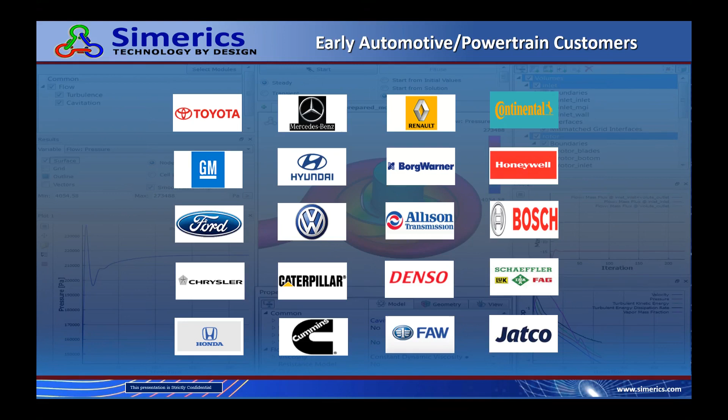As a result of that, all of these companies have become early users. Over that same period of time, from them until now, we now also have hundreds of turbo machinery type applications at companies as well. In the centrifugal axial pump world alone, we've got over 100 sites, and these are just a few of those companies.

Again, it's what this webinar is about today, trying to illustrate why these companies are choosing Simerics over other CFD, because often a lot of our clients have already got CFD, so they bring Simerics in to assist, or because it can do things so much faster. More recently, we've seen an upturn from other turbo machinery type applications, so fan companies, compressors, turbines, propellers, and turbochargers, these sorts of things.

As we grow as a company, as we get to talk to more people, the fundamental core part of our technology being fast, robust, accurate, it really resonates with a lot of people. We're very happy just to have so many more people turning to Simerics, as opposed to continuing to use other solutions that they have.

So what is it about Simerics? Well, in generic terms, this is what we're trying to do. We're trying to help people be more efficient in the way they use CFD, whilst maintaining the performance accuracy that they need when doing simulation, if you're going to use simulation at all.

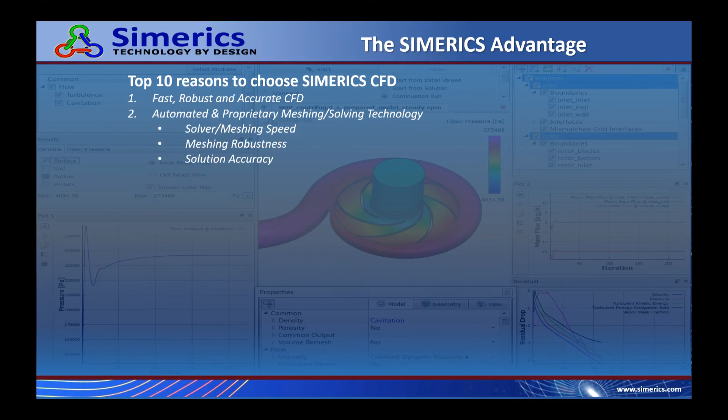Simerics does that for you, and that's really what we try to ensure. But all the time we know that our clients aren't going to be using our software unless we can make sure that we provide accurate solutions too. So there's no compromise in what we're doing here. We obviously want efficiency, we want more speed, but at the same time, we want our answers to be as accurate as they can be.

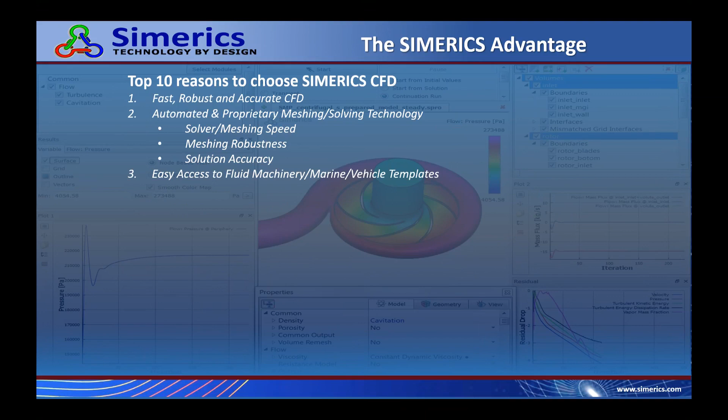We've enhanced the setup process from the very beginning. We have a template philosophy, so depending on the machinery type you have, you can grab a template from our library, and it then steps you through the process of building a mesh and setting up the operating environment, the conditions, etc., that you might need for that particular type of machine. That again is an area which helps speed up the whole process.

In more recent years, we've been partnering with a lot of other companies, and we now have embedded CAD front ends for various systems. So there's things like Creo, Rhino, NX, and Fusion. We can put Simerics right inside your CAD system if you want.

At the same time, we have various technologies and processes for integrating, so irrespective of what design solution you're using, Simerics now has a way of becoming part of that design process. And that really leads to leveraging your CAD geometry, because ultimately, that's what a simulation tool should do—it should be making use of your 3D CAD systems.

Part of CFD, the first step is always to create a flow volume. You have to have that empty space that exists, needs to become a part, so we can do some analysis on it. We do that. We can do that inside the CAD. We can do it outside your CAD system with our new Simerics CAD that's coming out.

We've also got beyond CFD. A lot of our clients are saying, well, what about optimization? What about acoustics, radiation, electromagnetics, FEA? Can you do these other things? So again, during more recent years, we've added to our portfolio, and now you can do a lot of these things inside the Simerics GUI.

Custom deployment—a lot of our customers do want, often ask us for something very special, and typically the answer is yes, we can do that because we've got this very powerful expression language that comes with the software. And the last point, I think a lot of clients recognize, is because we are still independent and intend to remain so.

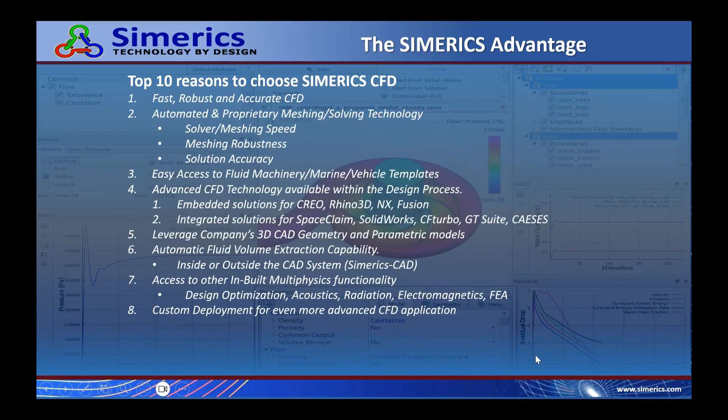So diving into a bit more of the why Simerics for turbo machinery: these hundreds of clients out there doing work with Simerics every day are typically doing a number of different things. What's of primary importance most times is, what is the performance of my product? It's sort of a given, whether they're looking at it at a component level or looking at how it performs in the system. That's clearly what they want to know.

They want to be able to virtually test that. At the same time, when making design decisions, you want to compare very quickly, so you want a means of doing prototyping, but doing it virtually.

But drilling down further, there's things like: what impact might cavitation have on the system of this pump? Is that going to cause failures? Are there noise issues occurring, or pressure ripples? Analyzing loads, leakages, NPSH studies even for a pump — these are the sort of things our clients are doing every day. We're used to supporting them; we have experience of these types of things. That drives us in terms of how we're developing our software and how we're looking after our clients.

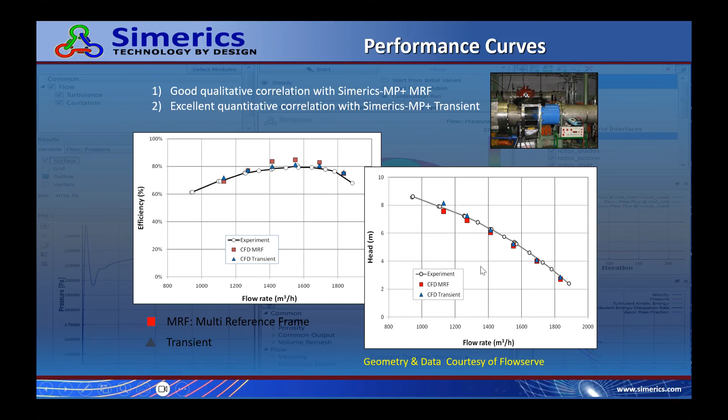On the issue of performance, everyone asks how accurate Simerics is when it's so fast. Well, very accurate. This is a test done many years ago by Flowserve. We have two approaches: the steady-state, quick analysis where you can pick up trends and make design decisions, but if you really want to nail the numbers — the experimental data — we always advise doing transient calculations. If you do that, this is what we typically expect when doing these comparisons experimentally.

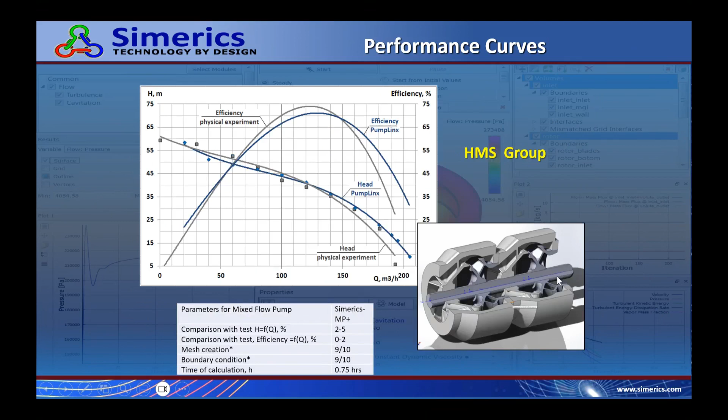This was another client who did an evaluation. They had an existing CFD tool and ran 3 test cases, producing all this data about how close we are to experiment. But the important thing is what they quoted in their report: yes, it produced very accurate answers, but it was the speed at which Simerics could do that. They were spending less than an hour typically preparing their CAD models, and it would just mesh straight away for them. The whole process was 10, even 30 times faster than their existing CFD tool, with accuracy levels within 1% and 3%.

So again, once clients typically do these tests, the argument for Simerics becomes pretty compelling.

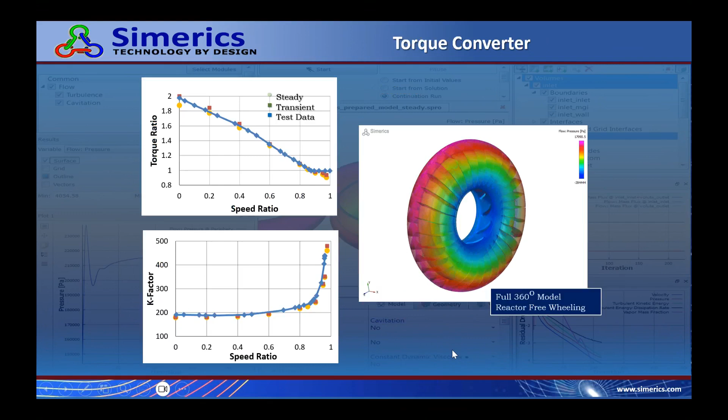And it's not just where there's some sort of motor driving the system — we can also do fluid-driven activities. This is a torque converter example, and again you see how accurate we can be. There's lots of capabilities in the turbo machinery area that we have.

Last few comments about testing: how we're testing is obviously critical, and everyone's always going to carry on doing that. What we're trying to do is help people optimize the amount of physical testing they're doing. It's not necessarily replacing it, it's trying to optimize it, because it can be a lot of trouble building these test rigs, such as a special test rig where you can actually see inside what's going on. Every time we do a simulation, we're always seeing what's going on inside the product.

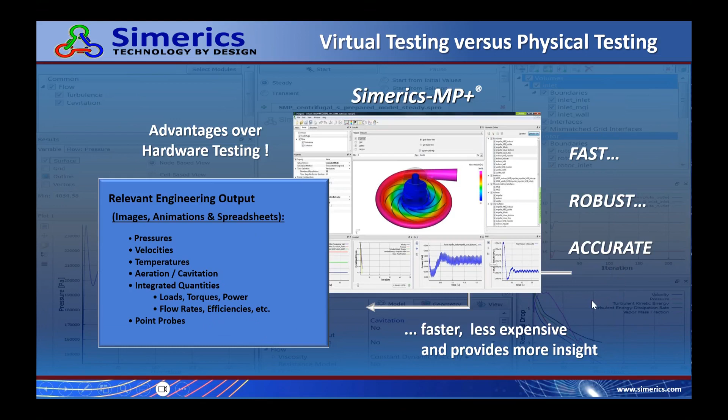So we want to make the best use of the physical testing you're going to do, and that's what Simerics is all about. The way we present the software, we want people to get information out quickly and efficiently — whether it's pressures and velocities, temperatures, cavitation quantities, torque loads — we want these things readily available. The only way to do that is with a tool that's fast, robust, and accurate, doing these things quickly, efficiently, reliably, so that you end up with this type of solution.

So in summary, it's all about speed, without any compromise on accuracy. If you've got small features, we'll include them because sometimes they can be important. We've got a range of physics modules that address all sorts of different things, such as cavitation, etc.

The robustness, getting a complete performance curve across the turbo machinery device is always very important, so we're very confident about that. And also, if you need to do full-blown system simulations, Simerics has that capability, and it does it, we believe, a lot better than anyone else.

Less than 2 days training is typically what we ask for when people want to start using Simerics if they haven't used it before.

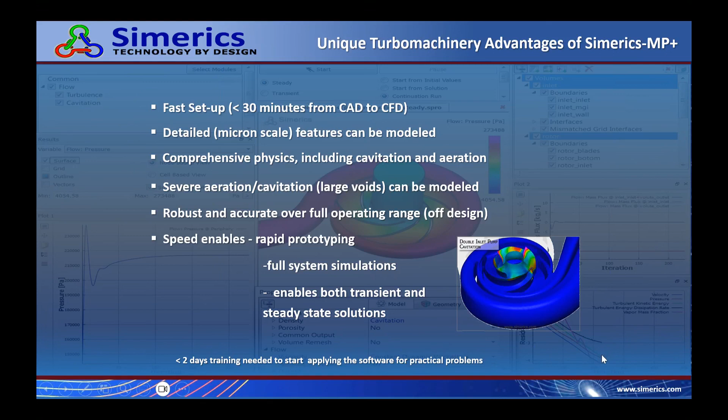So the last thing I'll say is just to set the scene for the demonstration you're going to see. We feel we have lots of different solutions for the way Simerics can fit into your design process. What we're going to show you is how we can very quickly and efficiently go from CFturbo, a turbo machinery design tool, straight into looking at virtual test results. That's really what this is about. And then we're going to go on and talk about how we go about optimizing things, etc. So that's what's coming next.

I'm going to stop sharing for a moment and hand this over to Mike. Can I make you the presenter? Okay, there you go, you've got it. You've got the thing. That's it, we got you.

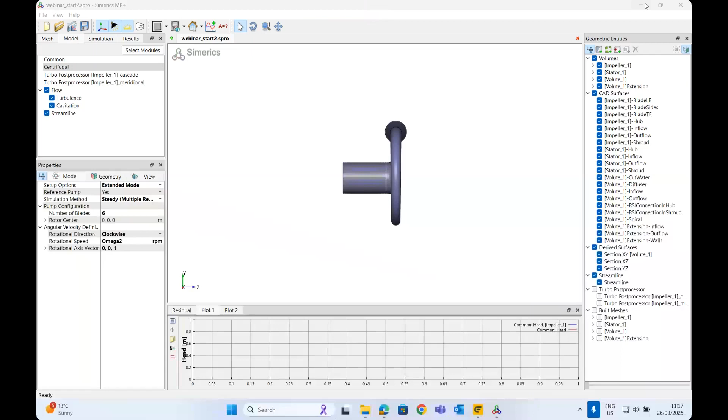So what I'll do here is go through the whole process in CFturbo. Let's start by designing a pump in CFturbo.

If I click on the pump generation thing, I can give it the design point I wanted, the best efficiency point I'm designing for here, and click OK on that, and it will give you an indication of what type of device is coming up. So it's a radial impeller there.

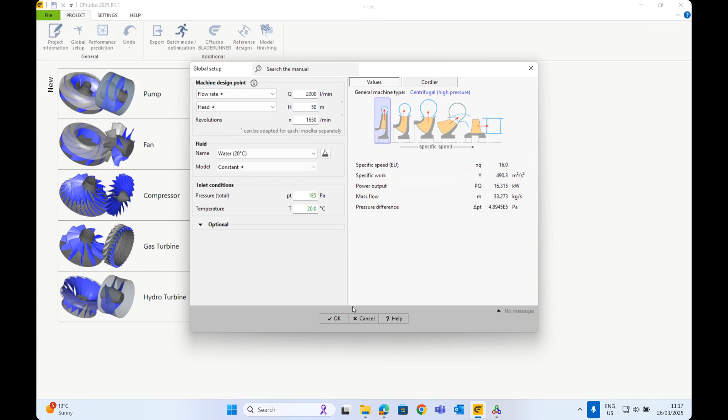If I click OK on that, CFturbo will step you through the process. The first thing to do is create the impeller, and I can go through various setup things in terms of whether I want it shrouded, unshrouded, or whatever, and put in some basic dimensions. Or I can just hit a fast forward button, and it will immediately generate a pump impeller for me.

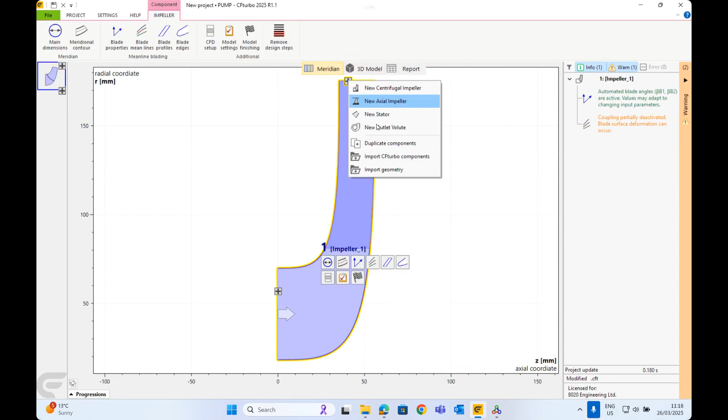On top of the impeller, to do a CFD analysis, I also need a volute on the outside of this. Again, there's a process you can step through designing each of the stages, or I can hit a fast forward button and it will create that.

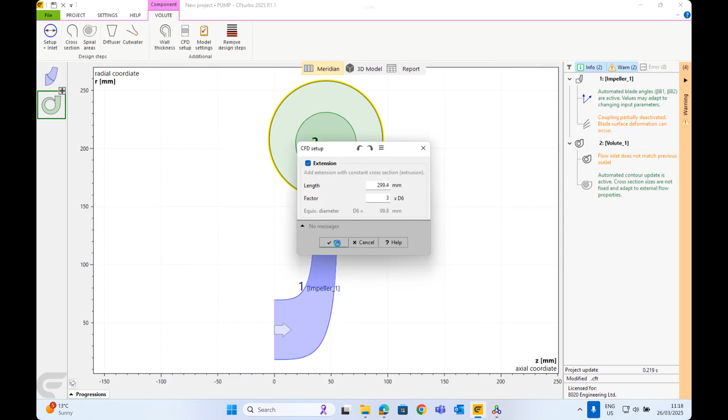As far as the CFD simulation, I probably need an extension on the outlet of the volute, so I'll add that in. It will also help to have a tube on the inlet of the impeller, so I'll add one of those in here. Let's just lengthen that slightly.

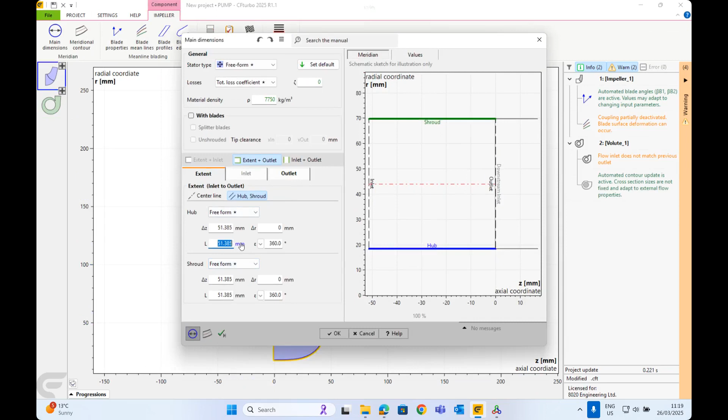And there we are with a 3D model of a centrifugal pump, ready to go. So the question then comes: is that going to give the performance I need?

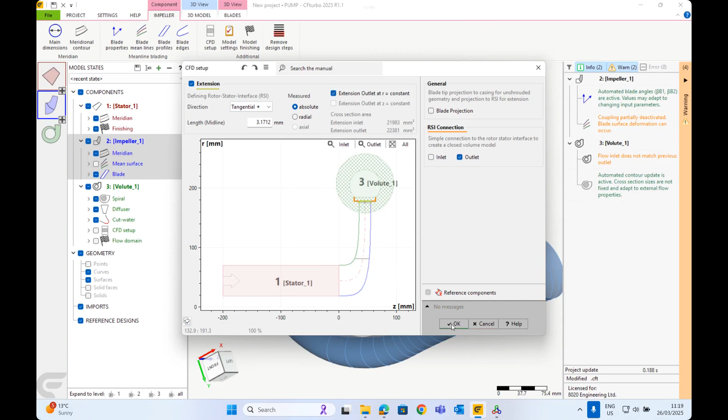So one thing to set up in terms of getting it ready for the CFD is just to add a connection between the impeller and volute. Click OK on that, and we can come to the project here, and we could export that to Simerics. First off though, I'll just save this model.

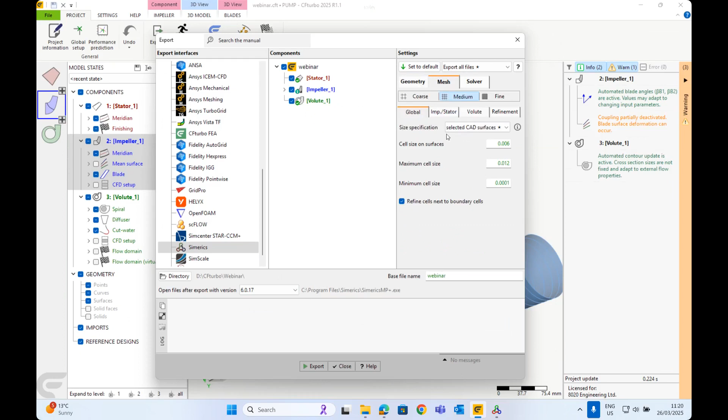If I come to export here, I can select all the components, make sure it's a virtual domain, make sure we're using a relevant version, and then we can just hit export here. There are a lot of controls in here as well for setting up the refinement level of the geometry the STL mesh is going to come up with, and then the finite volume mesh. In this case, I'll just leave it to default.

So basically it then goes away and creates the STL files of those three components, fires up Simerics, checks the license, and carries on from there. As it's taking a bit of time to generate the mesh, rather than keeping you waiting, I've actually just had that process completed here.

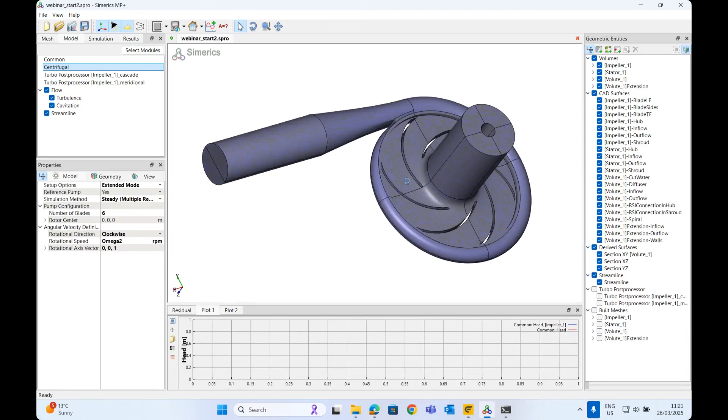So this is the mesh it will come up with, and you can see it's just started the meshing process. I could just show the grid it's produced and so on.

And then this model is just totally ready to run, so I can just hit the start button on this. And if I show the pressures on here, you can start seeing the pressures develop as the solution progresses.

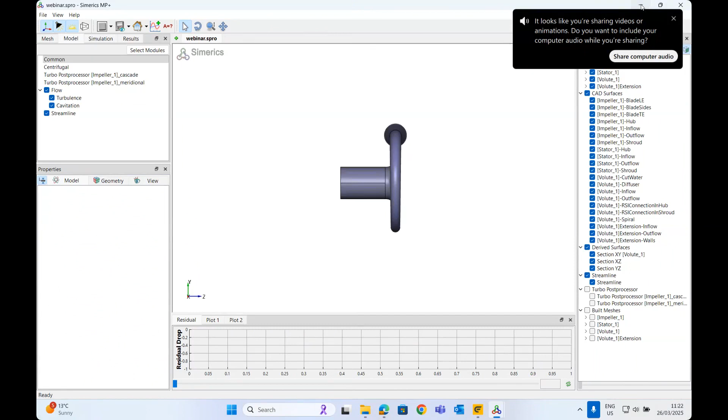That's actually finished the mesh on the other one now, so that gives you an indication of the time involved. So that's the pressures. I can also look internally, so I can get streamlines out, and I could color those streamlines.

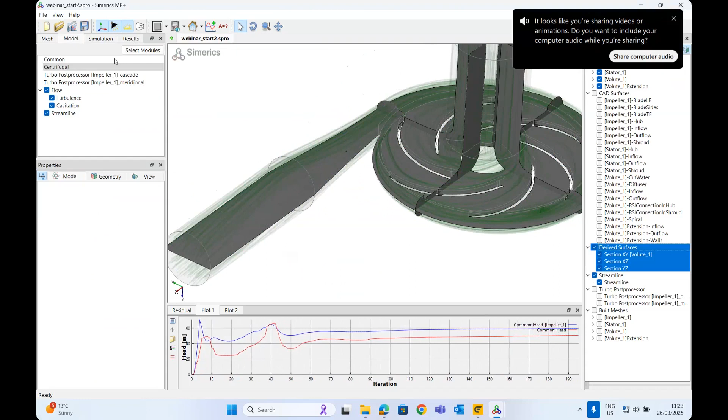Okay, so I got that back again. You can show the velocity colored on there, and I can animate those as well. On top of that, I also showed sections through the thing. CFturbo will actually automatically find those sections for me.

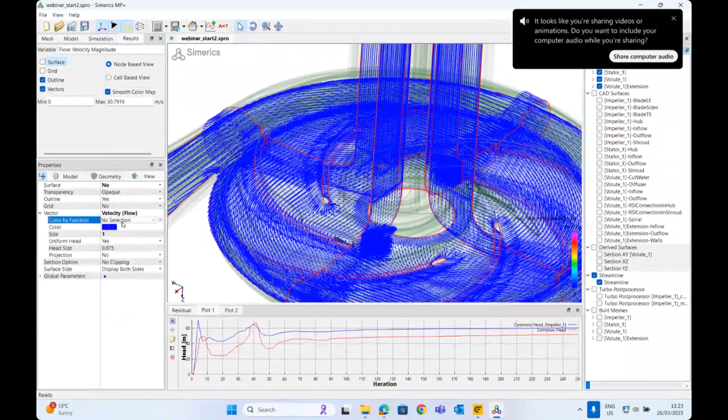So I could put show velocity on those, so you can get an idea of velocity flow patterns. And if I add vectors to that, I can show the colors on those vectors, and you can start diving in and seeing where things are.

So you probably also want to get out from here some actual quantities. At the bottom here, we've got a great graph going already showing the overall head that the pump is generating. If I zoom into that, the design was 50 meters, and I've just got a little overlap from the design, so it's performing well there.

And you can get efficiency graphs out of here, so get up to about 78% efficient there. And you can add more graphs in here, more information.

For instance, I could get the power out of this here, and you can change the units of that. So it's about 20 kilowatts required to turn the pump around on there.

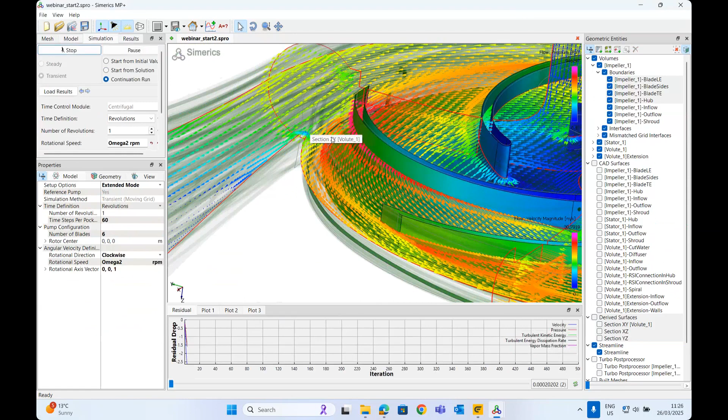I could also just restart this simulation as a transient simulation, 60 steps per revolution, and it's as simple as just starting that again. So the transient simulation will actually capture the interaction between the blades and the cutwater, which tends to increase the accuracy of the solution.

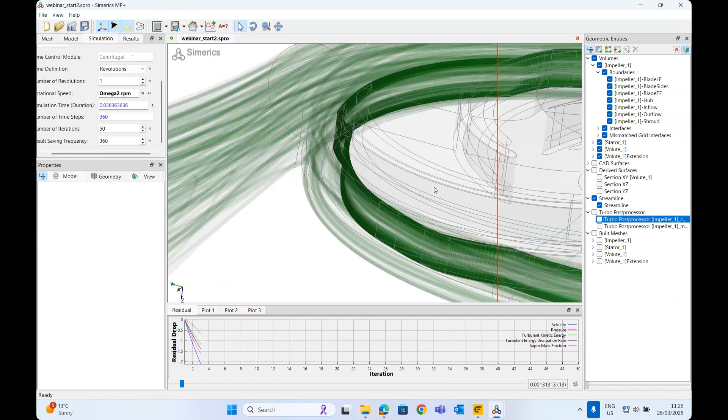See the animation coming on. There are also other plot information I can get on here. I can get a cascade plot of this.

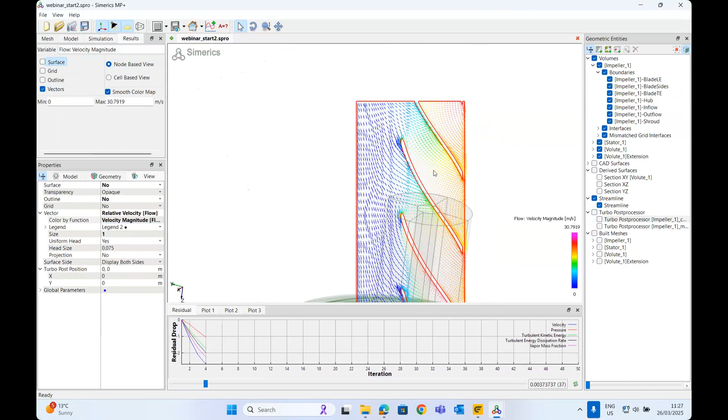So if I show the velocity on there, maybe I can show the vectors, and I could show the relative velocity magnitude. So this is a section halfway through between the shroud and the hub, and we're showing how the flow patterns develop through there.

To illustrate where that is, I can just change this to 3D mode, refresh it, and it then appears in the real position. So you can slide this up and down and so on.

So basically in the last 5 or 10 minutes, I designed a pump and simulated it fully steady state, and started a transient calculation on this. So we are well on the way to designing that. Really the next step from there is to talk about optimization. So I can hand over to Vignesh, who will explain some of our optimization capabilities.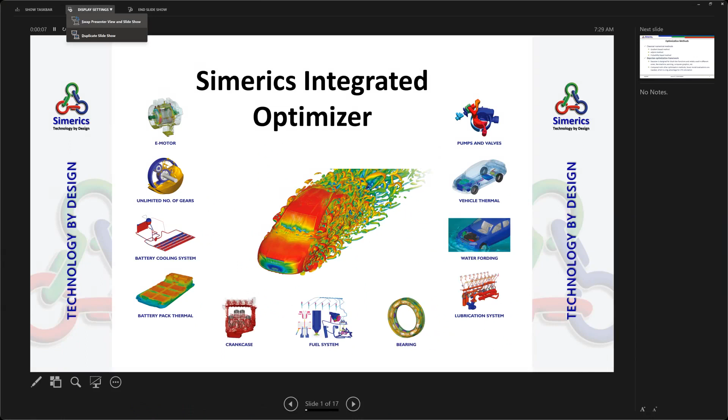So I do have a small demonstration of our optimizer. Before going into the demo process, I would like to go over a presentation so I can explain how our optimizer works.

In general, we broadly categorize optimization into 3 methods: gradient based, adjoint, and probability based. What we use in Simerics is the Bayesian optimization framework, which falls under probability based technique. The good thing about the Bayesian framework is it's widely used in machine learning, and it's a black box function in the sense that the optimizer itself doesn't need to know about CFD to perform the optimization process. It also needs fewer model evaluations compared to other optimization techniques such as gradient based.

So that way we don't have to do much CFD. We can get away with doing fewer CFD optimization runs and getting the optimized solution. So this slide will show how this Bayesian optimization works.

Say if we have one independent variable x and a dependent variable f of x, and this blue line is the relationship between these two. So I need to find a point x where this f of x is the maximum. That's my goal. But say I don't know this blue line yet. In a real world CFD simulation, you don't know the relation between the dependent and the independent variable. So you have to start somewhere, right?

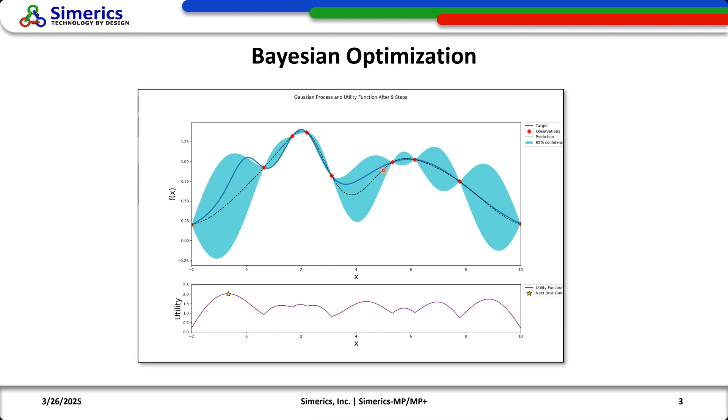Looking at both the spline, the polynomial that connects these points, and the probability, makes our optimization more robust. It's able to explore pretty much the whole parameter space, and we are able to get the whole curve and the local maximas within a few iterations. So that's how Bayesian optimization in general works, and that's how it works inside our software.

So to begin with, we started with 2 DOE points for a simple case like the previous one. But in reality, we have many independent variables, like blade angles. Say in a pump, you might have 6 blade angles. So then you have to distribute the sampling points evenly in the parameter space. In this case, say there are 2 independent variables, X and Y.

If you're distributing it randomly, you might leave some parts out, not exploring certain parameter space. That's why we use this technique called Latin hypercube sampling, where you put effort to distribute these DOE points evenly in space. This is a 2 parameter space, but even with a 10 parameter space, you'll still be able to distribute it evenly.

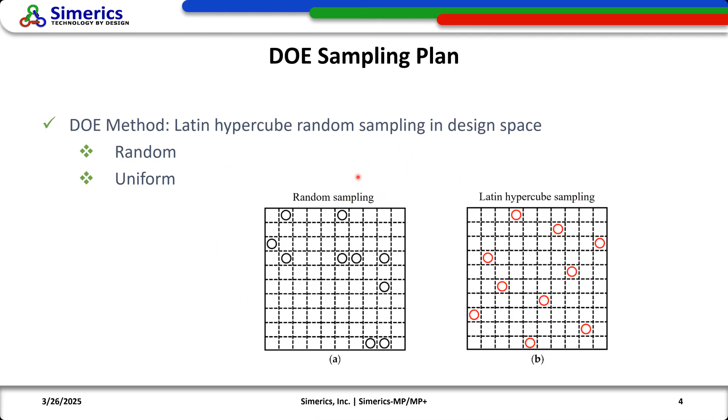This is the default option in Simerics, but we do supply random sampling in case the customer needs it. And this is the module interaction. I hope everybody has heard about Simerics and the CFD software. It's been there for like 20 years, and this optimization tool is relatively new, like 5 years give or take, but now it's really mature, and it's tightly integrated with the CFD solver.

You don't need to go to a separate window to access the optimization tool. So now we have the optimization tool, the Bayesian optimization, which I explained, and then we have the CFD solver, which Mike explained. But the missing part was this design software, which can be anything like Creo, SolidWorks. In this case, for today, we are using CF Turbo.

We are going to talk about CF Turbo. But the idea is we need to change the surfaces by some means, correct? That's the whole point that needs to be done. You just need to change the surface to do the design.

That can be done in many software, and we're choosing CF Turbo because they have all these sophisticated design options for centrifugal equipment. So this is where it fits — these two are tightly integrated, and we use different software to accomplish the

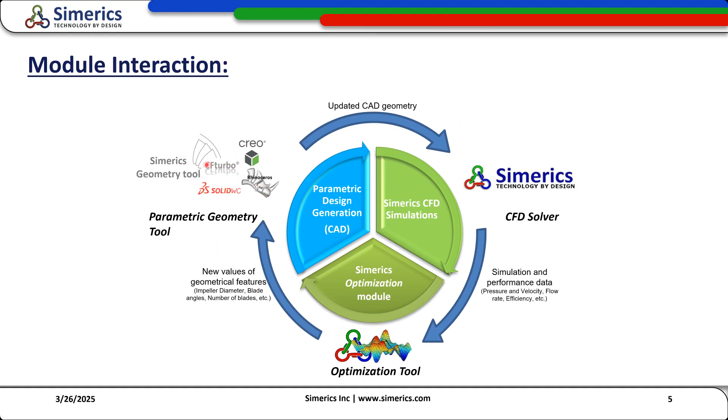parametric geometry tool. So this is the workflow of CF Turbo itself, the optimization with CF Turbo. It's pretty similar to other CAD tools, but this is with CF Turbo.

You start by doing what Mike did — just create the CFD simulation. Within like 10 minutes you can do that. Then you create a sampling plan: how many DOE runs do you need, and how many optimization runs you need. Those are the things you need to pick.

Then we start with the DOE loop. You start from the sampling plan — say you have the DOE points distributed evenly in space, and you take one point and create a new design using CF Turbo. Then you conduct the CFD simulation and construct the surrogate model. If we're doing like 50 DOE runs, you do it 50 times, refining the surrogate model each time — basically this loop.

After 50 times, say you want to run 50 more optimization runs — then you enter the optimization loop, where you check from the surrogate model which is the next best point. We pick that best point, based on the probability of it being the best from the utility function, like I showed. Then you take the new design, conduct the CFD simulation, and refine the surrogate model again.

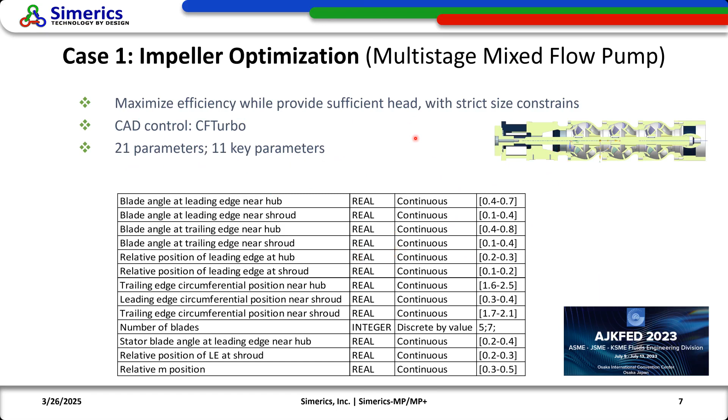So we have this multi-stage pump, as we see here, and we have 21 parameters, 11 of them are key parameters needing optimization, including blade angles and number of blades, and many other constraints. Our goal is to maximize efficiency, maximize head, with strict design constraints like the impeller diameter and things like that.

This is the optimization process — DOE runs and optimization runs. We did 50 DOE runs and then 110 optimization runs. You can clearly see in the DOE runs there's no real pattern — efficiencies are all over the place. But once optimization runs, our optimizer tries to find the best design for each design variable, and tries to optimize the single stage efficiency.

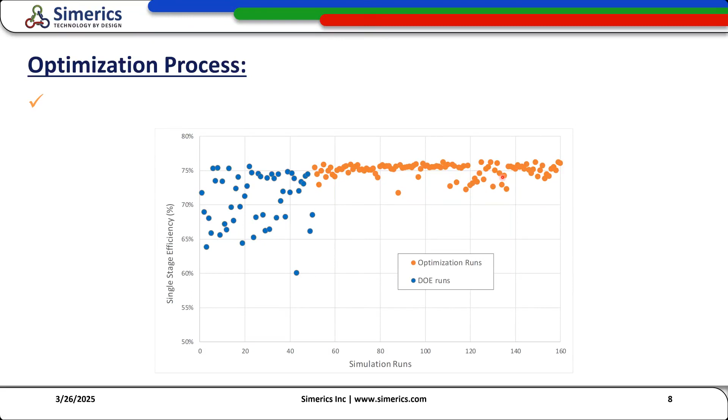We can also do sensitivity analysis with the DOE runs, because the DOE runs are randomly distributed. In our case it's Latin hypercube based sampling, but still there's no specific pattern in how we distribute the parameters in the design space — the DOE points.

We usually start with many variables, then do a single run of optimization, then drop many of them and only keep whatever has a major impact. That's what Pearson sensitivity does — it points out which variables have more impact on the objective function, in this case head.

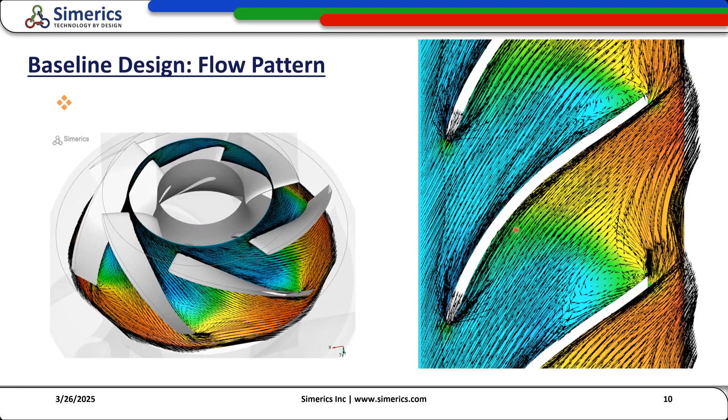So we set up the optimization, and we were able to get an optimized design where we completely got rid of this recirculation. We didn't even have to realize there was a recirculation — we didn't have to change the blade ourselves manually. It automatically does it for you. That's very powerful — you can change some physical aspect of a fluid without really realizing that was the cause of the problem.

So you don't have to really think about that so much. That's the key point to show here. And then we're able to improve the head and the efficiency by 24 and 18% respectively.

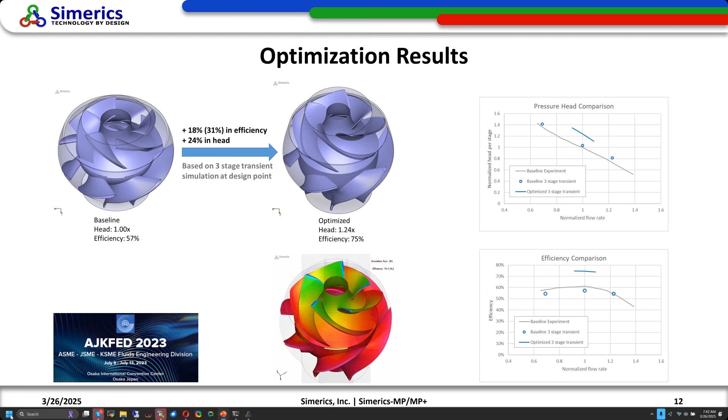So that's the presentation I prepared. I hope it's clear how the Bayesian optimization works and how it's integrated in our software, and how it's talking to CFturbo and whatnot. So now I will start the demo.

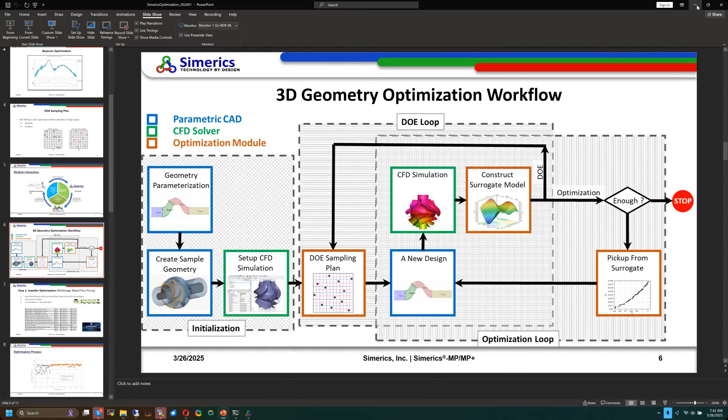It'll take like 5 minutes to show. So I'm going to start where Mike started. You just need a CFturbo design file. In his case, Mike prepared the design himself. I'm just going to use the tutorial case which we have.

So what you do is you go here, and then project, and then before that you can do the 3D view if you want. So this is how the pump will look like.

And then you go here and go to export. First, get the project files, Simerics project files. You select all of them and then select export all files, and then say export. Make sure you select Simerics over there, and then click export.

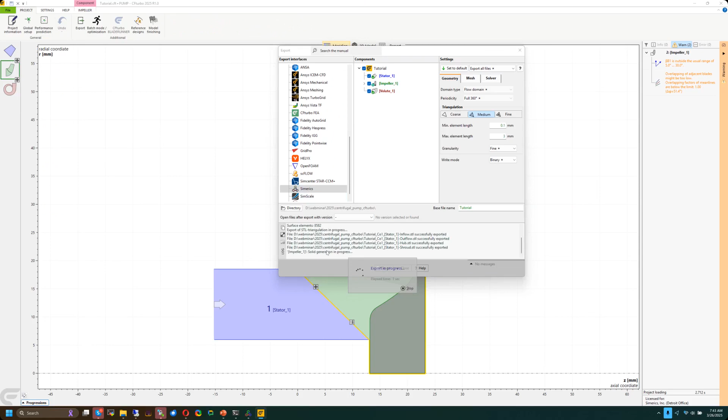Okay, so it took like 8 seconds. Here we started with the design file. We got a bunch of files, one of which is the Simerics project file, which you can open to just simulate this design.

But that's not what we're interested in now. We want to set up the optimization, right? So then we close this, and then you go to the batch mode or optimization.

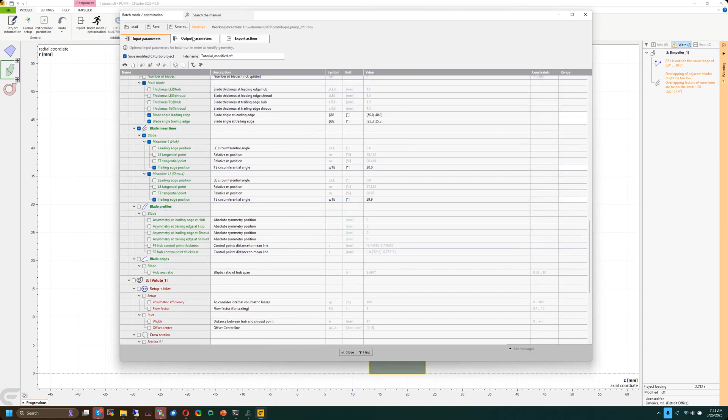Here they give you a chance to pick whichever variables need optimization. Like for example these blade angles, I'm going to select these 4 blade angles and then 2 more blade angles here. I'm going to optimize for 6 blade angles, and then here I go into the export option.

I select Simerics, and then I select this, and then make sure only STL files are exported, because we don't need to export the project file now.

Every design change, all we need is this impeller. Basically, we don't even need these—just the impeller is what's going to change, because the blade angles are associated only with the impeller. So only STL files concerning that, and then click add, and then click save.

Just save under the same name, tutorial. And then that's it. So if you go back to your folder, you will have an additional file called the batch file. This batch file acts as an interface between the design file and your Simerics project file.

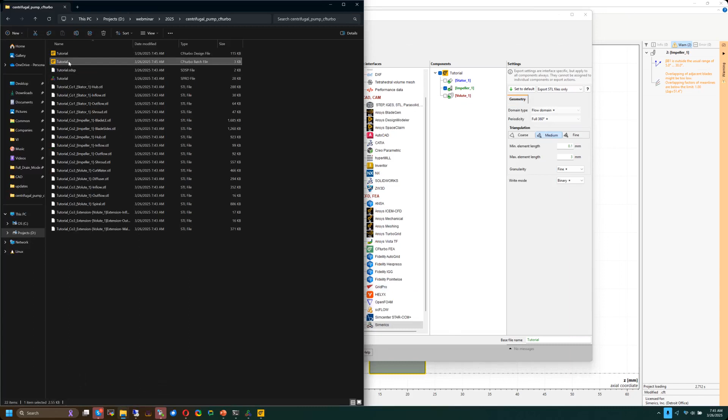So this is how you communicate between these two files, the design file and then the spro file, in case you're wondering. So I'm just going to close this—that's the part with CFTurbo.

Now we have to do some more things in the Simerics part. Now we got the batch, we got the spro file, but we still need to add the optimization module. I already added it in this project. I opened it and added it. I can go over how I did that.

So this is our spro file, which is a Simerics project file, and then you go here, and under the models you can select optimization and add it here. So I already added it here.

And then under the optimization module, you'll see some of the options I mentioned before. This Latin hypercube—you have the option of selecting random or Latin hypercube, but I'll leave it at the default, which is the Latin hypercube, and I can make it extended mode to show more options.

And you need to select all of—I remember I did 6 blade angles, right? So you need to declare these 6 blade angles here, and then you need to give the min and max of those 6 blade angles' range.

And then we need to pick up the objective function. In this case, I'm doing efficiency, and I'm doing a steady state simulation. The last 50 values of a steady state simulation, I'll calculate the efficiency, and that will be my objective function.

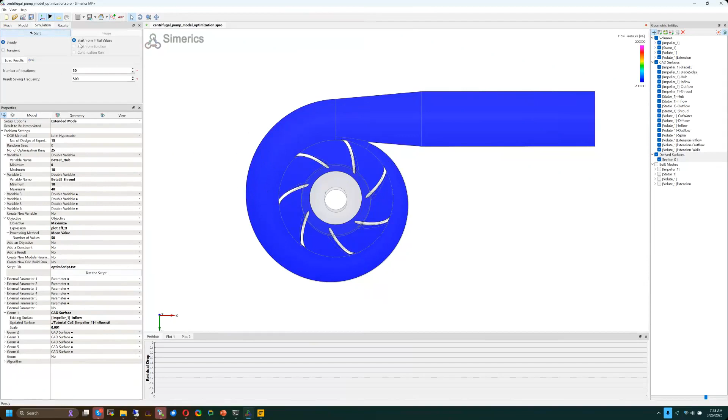That's how we set it up, and I'll quickly show the run. I'm going to start from initial values. I'll also show you this command prompt, which is how we talk to CFTurbo. If we launch a new command prompt like this, inside that we're talking to CFTurbo and getting the design.

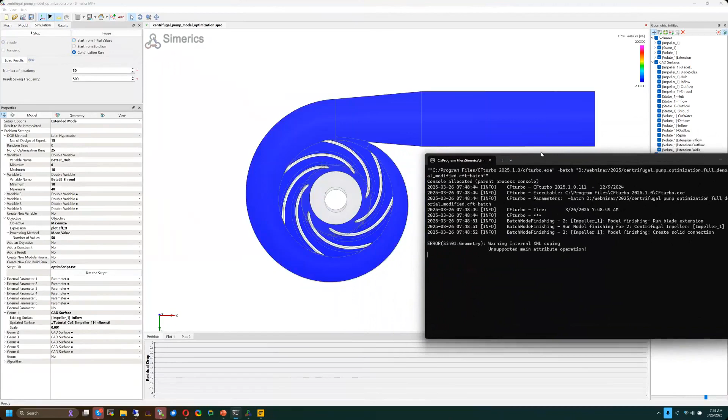CFTurbo has already generated a new design now, and it's being exported. You will quickly see that this blade design will change on the screen. See, it's changing now. So this is our first design, and you should be able to see some results soon. See pressure — you're able to see the pressure, and Mike has already shown all the post-processing capabilities, so I'll just leave it at that.

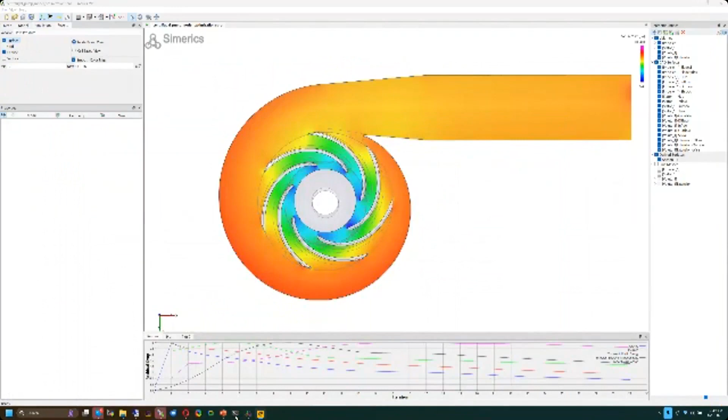But the idea is we were able to change the design using CFTurbo with very minimum work, right? And then there will be a second design change incoming. First I just put 30 iterations so that I can show the design change, but I will have to run a bit longer. Say I put only 30 iterations.

Okay Vignesh, that's great, conscious of the time, so that's brilliant. Thank you. You there yet? Good time to hand over? I'm done, yeah, I'm done. Okay, alright. Yes Sharant, are you available? Can somebody give me the presenter? Yeah, there we go, you've got the presenter. Thanks Vignesh.

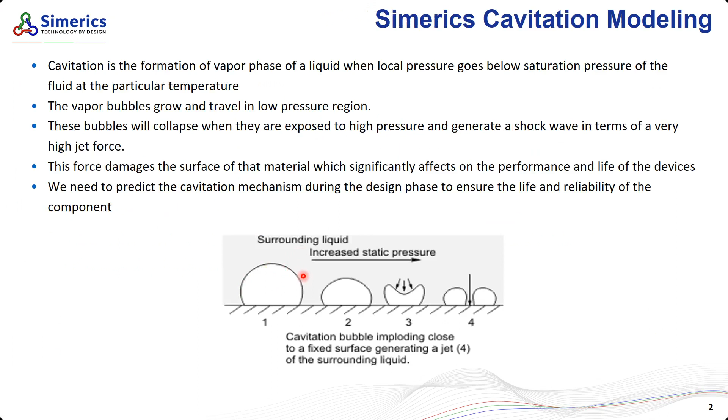When these bubbles collapse due to high pressure, you can generate a shock wave in terms of high jet force, and this is the reason for some damages it causes on the surface of the material. Numerically this is quite a stiff problem to model, because as the bubble grows, the pressure from the outside needs to be tightly coupled with the bubble growth formation. The rate of growth of the bubble is dependent on the pressure and vice versa, so you have to tightly couple this problem, and usually the solvers struggle with this.

If you look at other solvers in the industry compared to Simerics, this is something we do as a bread and butter case, and we do it in a very robust way. The density differences typically can be in the order of 10,000 or above, and since the ratios can be this high, any small changes in the non-cavitation region get very amplified.

So that's part of the reason why sometimes some of the other solvers struggle with convergence, basically.

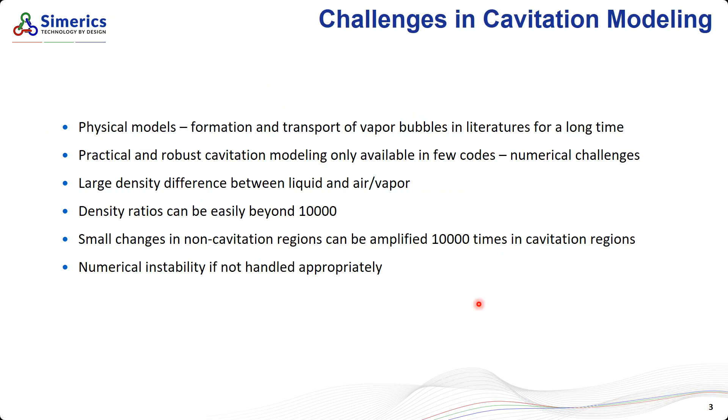In Simerics, we have 5 different levels for a cavitation model. We start with a basic model, constant gas, which addresses free air and liquid as well as the vapor of the liquid. And then we go all the way to the highest complexity where we have free air, dissolved air, vapor as well as liquid. In this model, we also have rate constants that dictate how the air expands and collapses. So it's a very sophisticated model that can be used based on the need for the physics to be modeled.

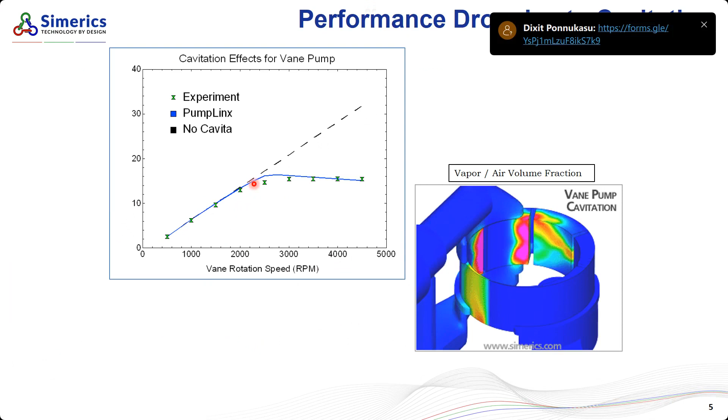Here I'm showing an example of a vane pump. Essentially, as everybody realizes, the flow rate curve of the vane pump is directly proportional to the speed. Here's the flow rate on the y-axis and the speed on the x-axis, and you can see it should be a linear curve. But when cavitation occurs, the curve deviates from linearity, and at some point you'll see it sharply plateaus. That's the experimental data shown here in the dotted points, and you can see the Simerics simulation can capture this trend quite well. That shows that the cavitation model we've implemented can pick up the fall off of this curve as a function of the speed of the pump.

And here on the picture on the right, it shows the amount of vapor or air bubble that gets formed, basically. The next test case is of an axial flow pump.

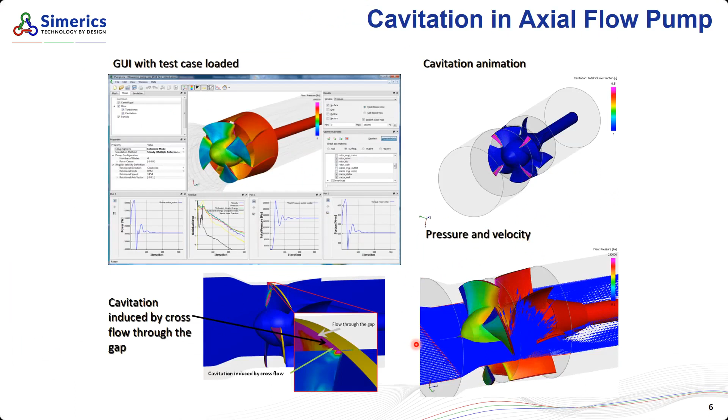Essentially, this pump is in a test chamber, and you push some flow through it. When you run it at certain speeds, you'll see that a cavitation bubble pops up at the blades, right? So we can essentially study this bubble as a function of the flow rate being pushed. This is what has been done with the test data, where they monitor the bubble forming on the blades as a function of the flow rate coming in.

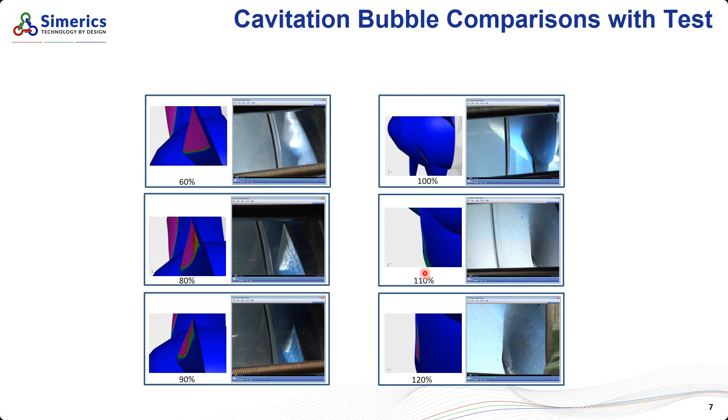What you can observe here is the simulation results on the left side compared with the experimental data on the right side for the different flow rates we've run. As you see, as the flow rate increases, the bubble size drops, and at some point the bubble becomes very small. That can be captured by the simulation quite accurately. Here I'm showing qualitative pictures, and we also have quantitative numbers in the paper.

So CFD actually offers a glimpse into the operation limits. For that, you need to have a good cavitation model - that is the foundation of this NPSHR. You need a cavitation model that can capture the physics accurately so that you know this is the NPSHR of the pump.

For this, what we have done is develop an automated tool. Essentially, the tool guides the user through the process of calculating NPSHR. We have a paper that lists the different steps you need to follow, and we've used that paper to create this automated tool. So it becomes an automatic process for the user to go through to calculate the NPSHR for any centrifugal pump.

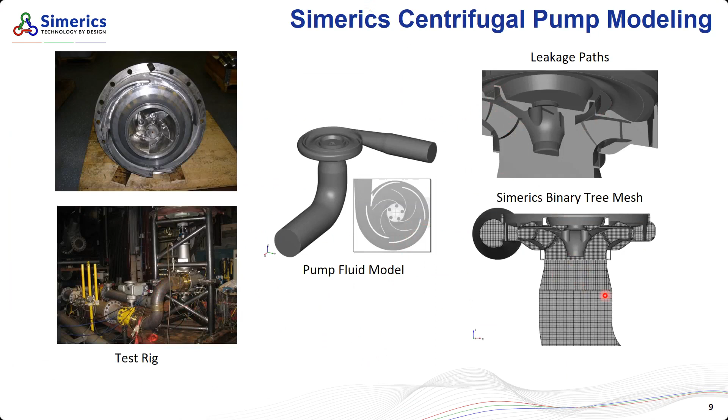Here I show a demo case where the pump was tested in the test rig, and we have a fluid model built in Simerics. One thing we can observe is we capture all the leakage gaps. We have a structured template mesh that can be coupled with the outside mesh using our mismatched grid interface algorithm, which will then capture the flow leakages quite accurately. And then I'm showing the mesh cross-sectional view here.

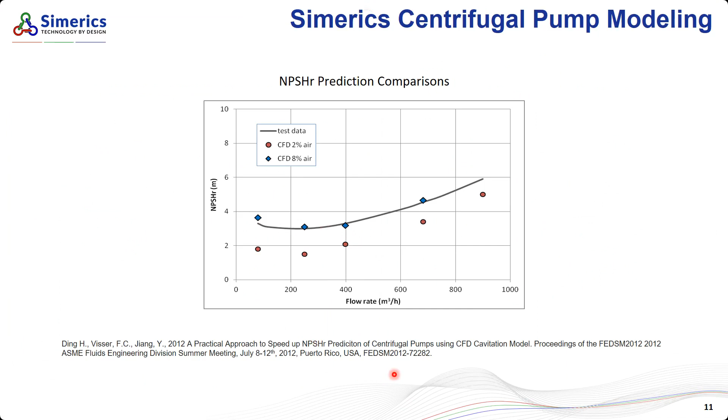The next capability we have developed in the turbomachinery field is the acoustic capability. It's been there for about a year now. It's fully parallelized, you can do moving sliding meshes, and it's inside the Simerics interface - it's our own native acoustic solver. You can just pop in this module in your Simerics simulation.

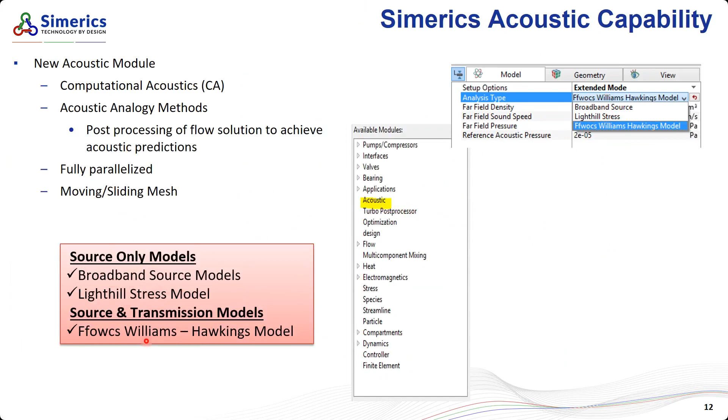We have 3 different models: source only models, which is the broadband source and the Lighthill stress, and a source transmission model, which is the Ffowcs Williams-Hawkings (FWH) model. To validate this, we have done an extensive amount of study, but here I show a fan study that we are publishing now at a conference.

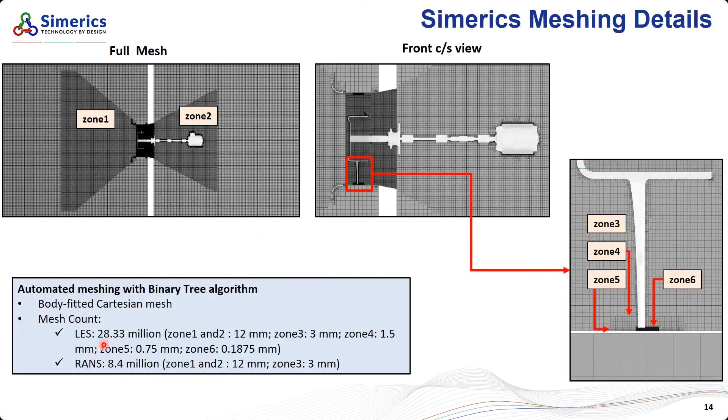We have to do some refinement around the fan to capture the eddies that develop coming out of the fan, and we also have to use LES to get favorable comparisons. This is about 28 million cells. We can run RANS as well, but LES compares more favorably typically for these types of applications.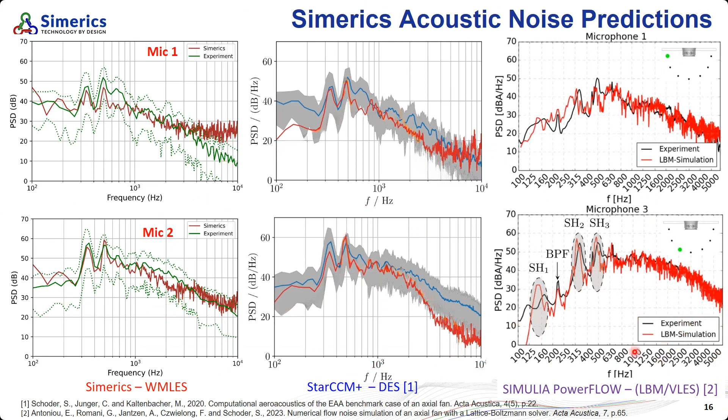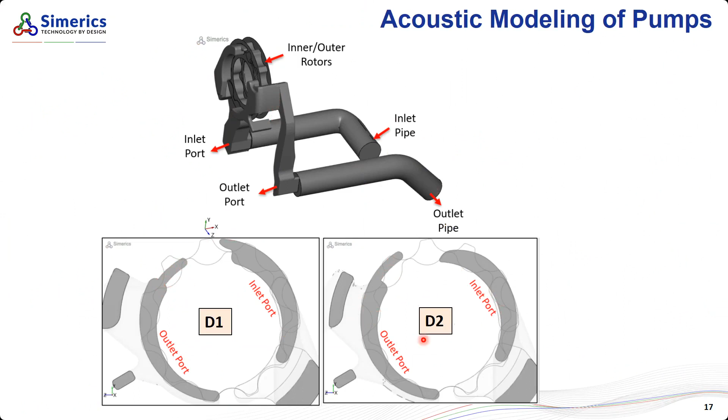One more case study for the acoustic capability that we have published is for a design of the gerotor pump. They have two different groove designs - D1, you can see the groove looks like this, and D2, the groove looks like this. In the test, they measured the frequencies and SPL levels, normalized as a function of frequency.

The paper has some more things, so I don't have time to go through it all here, but if you're interested, we can share this technical paper with you.

The last one is the FEA capability. This is something we have developed from scratch. It's our native FEA solver.

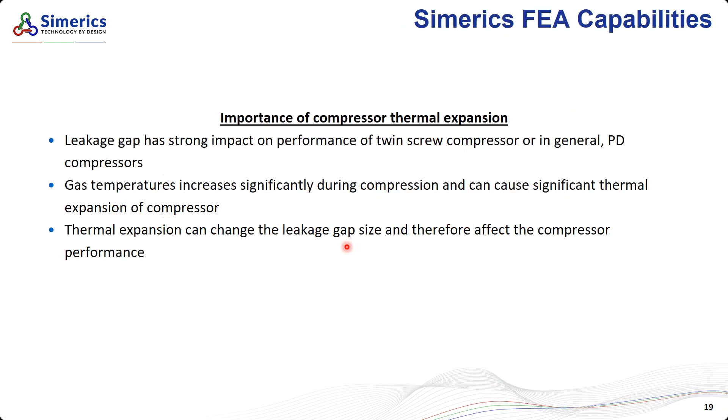We have used it in a few cases, and this is a screw compressor case. For twin screw compressors, due to gas temperatures rising during compression, it can cause higher thermal expansion of the compressor. This can change the leakage gap, which is very important because you're pushing air through, and leakages can affect the results quite dramatically.

The way it works is we have the Simerics CFD solver, which is the fluid and heat transfer model, and that talks to the Simerics CFD solid model, which solves the heat transfer. This loop keeps performing until we have flux convergence, then we go to the structural solver to modify the geometry, and then come back and do the coupling again. This is explained in the algorithm.

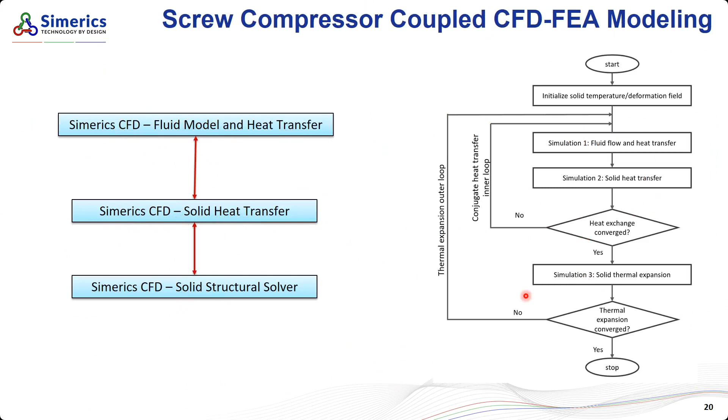The fluid mesh is about 3 million, the solid mesh is about 0.4 million, and we can model the gaps using our general gear template. It's a very unique approach - we brute mesh the entire thing and squeeze it into a very small gap, all the cells, and the solver can still handle the mesh without any convergence issues.

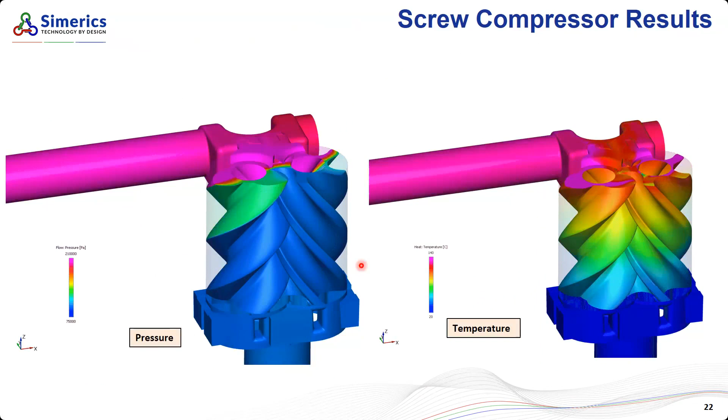This is a pressure contour and a temperature contour. There is no necessity to babysit this process - you're guaranteed a solution and you're not going to diverge. We've done quite a lot of cases with this general gear template, and it's extremely robust. Here you're looking at the solid temperatures and the rotor thermal expansion that is plotted.

Once the thermal expansion distribution comes in, we morph the geometry of the solids as well as the fluid, and then come back - this is an automated process written using a script. The resultant is essentially the mass flow rate from the simulation, which we compare with experimental data as well as the rotor power, and we get favorable results.

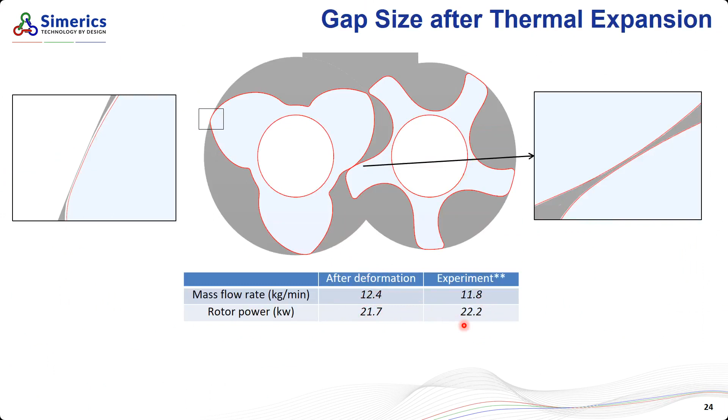To conclude, I think what we have done in this field is start with cavitation physics, which dictates the NPSHR for any pump design. We've added acoustics, we've added FEA, and now we're coming up with our own CAD kernel - we call it SMP CAD. That's going to make it a product portfolio which addresses multiple physics, does it in one platform, and does it in a robust, fast, and accurate way, which other people can claim, but we have a product that does it. So I'll end it here.

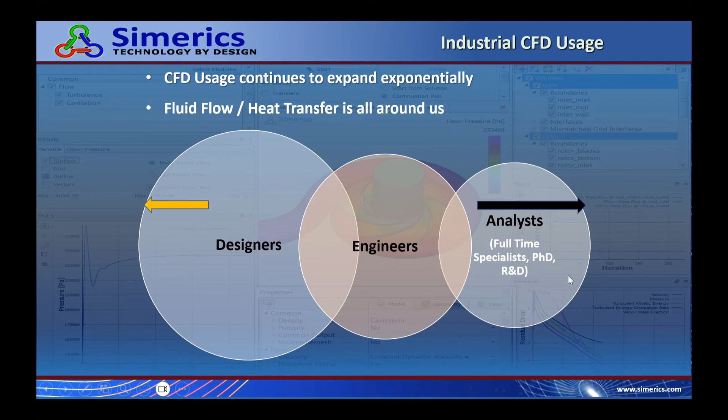Basically, as a company we've been around for quite some time now, and our client base - we tend to look after them very well, and our clients know us, particularly in the fluid machinery space. In the bigger marketplace, the world, Simerics still isn't known as well as other CFD tools, and that's what we're trying to change. CFD usage is going to continue to expand - fluid flow, heat transfer, it's all around us. We've traditionally had a lot of clients who are full-time CFD analysts, and we've also got a lot of people on the design side who work with Simerics through our partner companies as well.

Our vision, the way we want to be different, is to fill this void that exists. There are lots of challenging engineering problems out there that involve fluid flow, and you need the fidelity of a CFD tool that can give you accurate answers, has all the physics, and can run. It needs to be robust, but at the same time efficient. It needs to run quickly and fit into your design process, and that's really where we feel Simerics is different, in that it can provide all of these things under one roof.

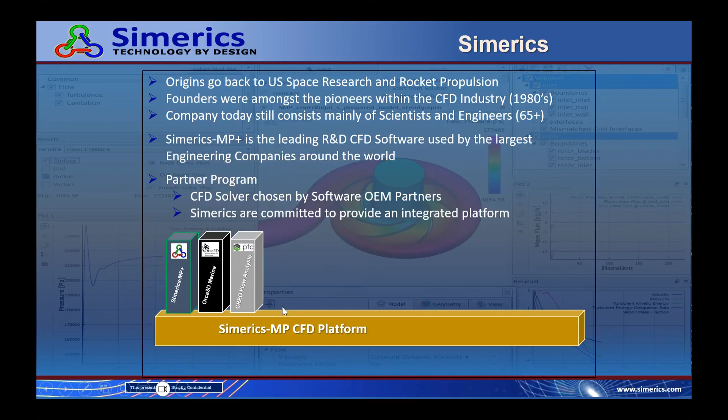A lot of our clients know about us, and that's fine. But what a lot of people don't know is that many other software companies have started using Simerics as part of their solutions. There's a company called Orca 3D in the marine sector, and PTC themselves, CF Turbo, etc. They provide Simerics to their clients as part of their offerings - Rhino, SimScale. People have probably heard of these companies, but what they don't necessarily know is that the CFD they're using is actually from us.

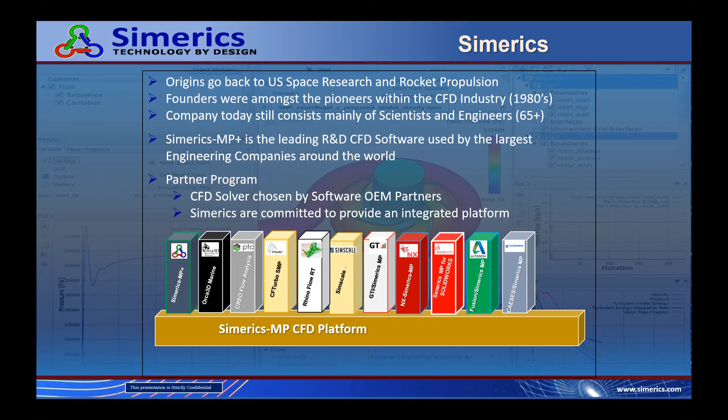That's enabled us to develop a whole range of capability, irrespective of what CAD system you're using or how you're driving your CFD. We have solutions for doing that, and one of the things that's culminated is that very shortly we've got a new module coming out called Simerics CAD. That's our ability to bring in any format of CAD directly into the Simerics environment, extract your flow volumes, do everything inside Simerics, and then take advantage of all the other things Simerics has to offer. We're using it internally at the moment, and it'll be shortly available to all our clients as well, which we think is a real step change in terms of fitting into the design process.

We've also got a cloud offering coming out soon, which is really there to complement existing license holders. People will be able to bring their license and use it on the cloud if they want, or they could just log on and use our software through the cloud. Again, it's just another way of hopefully offering our tools to a much broader audience, and that's our plan.